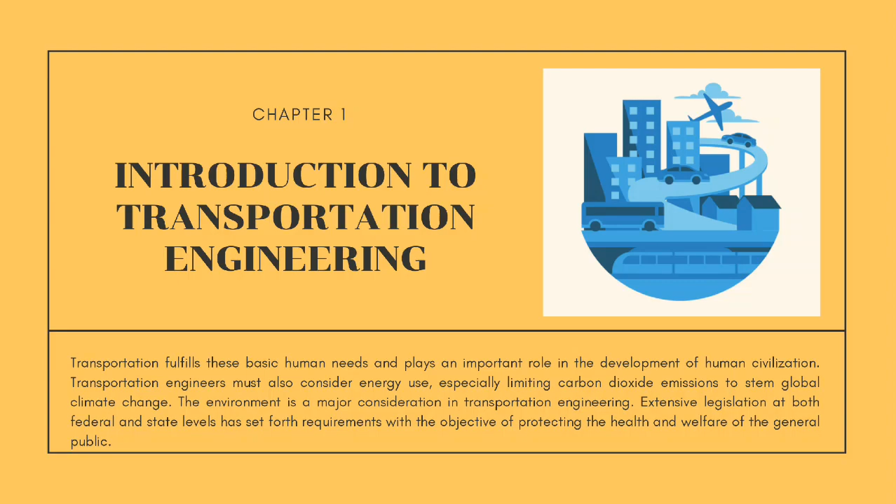So here's the table of contents of this video presentation. Chapter 1, Introduction to Transportation Engineering. For example, it is easy to observe that there is a strong correlation between human settlement development and transportation proximity. There is also a strong correlation between the quality of transportation and the standard of living, and society's expectations of transportation are high.

Under transportation engineering, we have first the transportation system. It can be defined as a combination of the elements and their interaction. This definition is general and flexible enough to be applied to different contexts. So we have here 4 terms of transportation system: the first, characteristics, study context, background, a changing world, and the role of the transportation engineer.

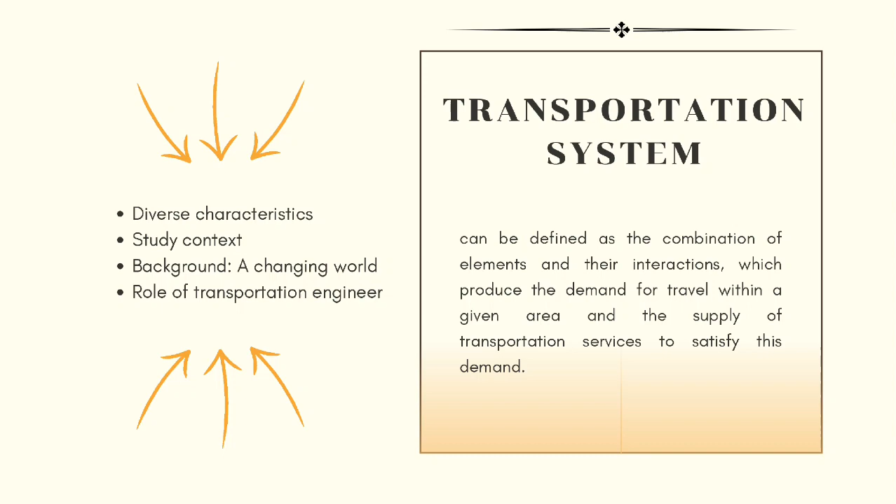We have here the characteristics of the transportation system that make it diverse and complex. First is multimodal. It covers all modes of transportation. Next is multi-sector. It covers issues and perspectives of the governments, private companies, and the general public. The third one is multi-problem. It ranges across a spectrum of issues that includes national and international policy.

Next is multi-objective. And the last one is multidisciplinary. It references the theories and methods of engineering, economics, etc. If we have the characteristics of the transportation system, of course we also have its context, and these are the following: planning range, passenger transport, freight transport, and international transport.

In particular, a strong interrelationship and interaction between transport and the rest of society is important for traffic planners in a rapidly changing world. Among them, 4 critical dimensions of change in the transportation system can be identified: changes in demand, changes in technology, changes in operational policy, and changes in the values of the public.

Finally, the last term is the role of the transportation engineer. So as I said in the definition of transportation engineering, they are responsible for planning, designing, and maintenance of civil engineering projects relating to transport networks. So transport engineering involves the analysis and evaluation of traffic signals, signs and markings, as well as the condition of the environment surrounding the infrastructure.

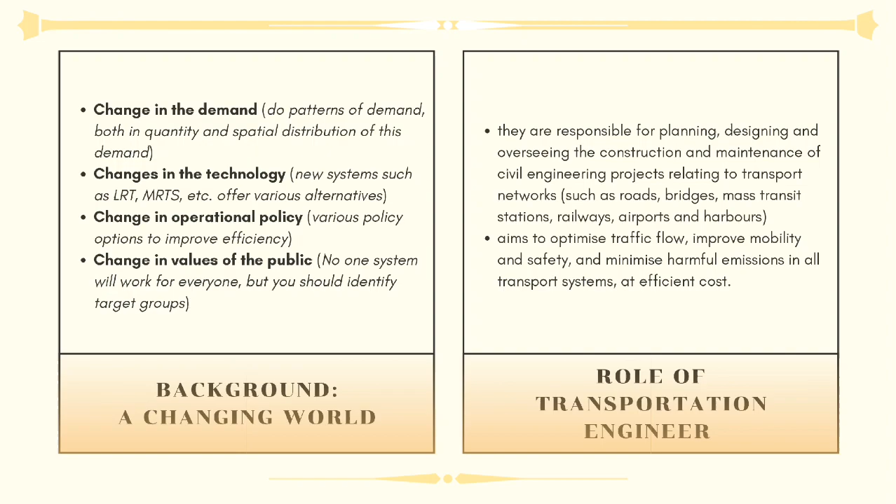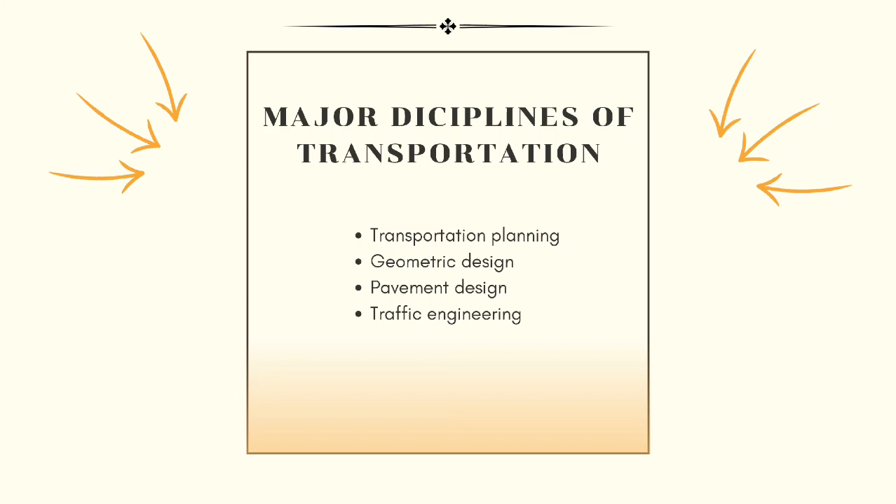Transportation engineering broadly consists of 4 major parts: transportation planning, geometric design, pavement design, and traffic engineering. Transportation planning can influence everything from business to recreation to quality of life. Geometric design includes transverse features, horizontal alignments, vertical alignments, and intersections. Pavement design mainly includes structural aspects, functional aspects, and drainage.

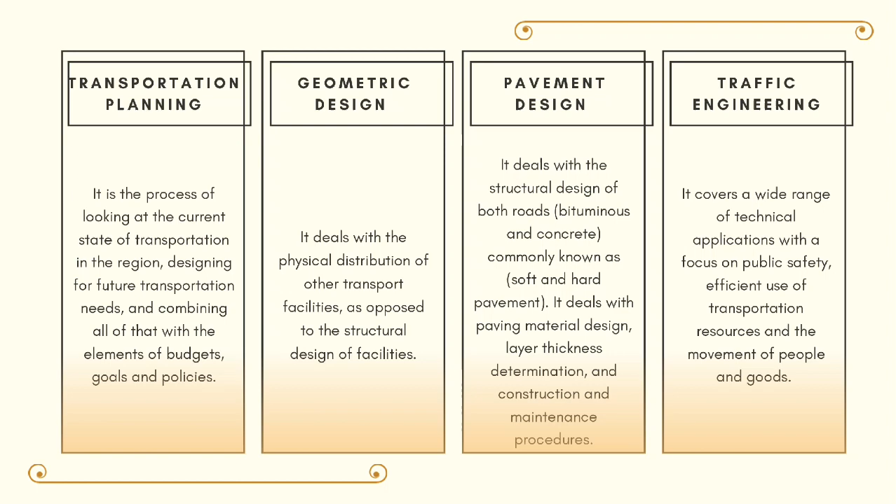The last one is traffic engineering. In short, the role of transportation engineers is to protect the environment while providing the mobility they lack, ensuring economic activity and ensuring the safety of people.

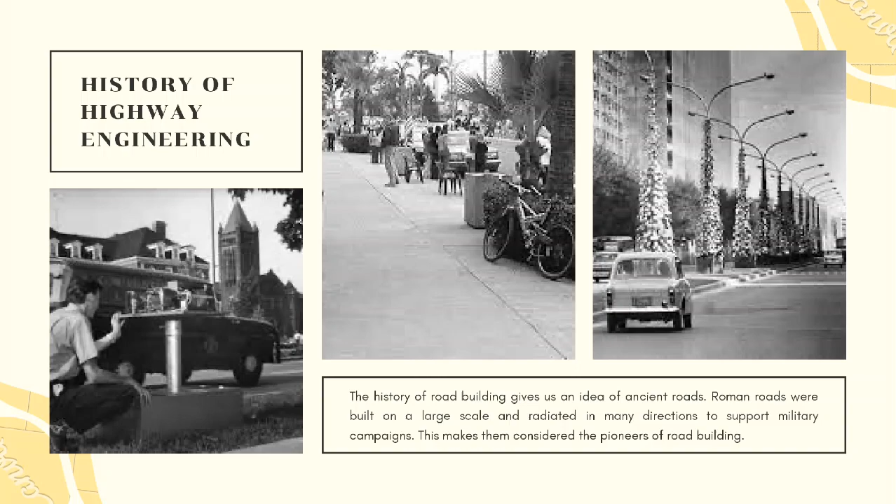Now we move to the next chapter, which is the introduction to highway engineering. So road building became known in the late 20th century after World War II, and road construction standards are constantly moving. So here I discuss the history of highway engineering. The history of road building gives an idea of ancient roads, and this section discusses the details of ancient roads, Roman roads, French roads, British roads, and more.

First is the ancient roads. We have 2 modes of transport here. The first one was by foot, and the second was the use of animals for transporting both men and materials. Under the second mode of transport, the invention of the wheel happened, and it led to the development of animal-drawn vehicles. To provide enough power to carry the wheels, newer trails tended to follow the sunnier, drier side of the trail. After the invention, the development of animal-pulled vehicles created the need for paved roads.

The next step was the construction of the Agger. It was a raised structure up to 1 meter high and 15 meters wide. The top surface of the pavement structure of the Agger was very different. Of course, it also had the main feature. Concrete was thus a major innovation in Roman road construction.

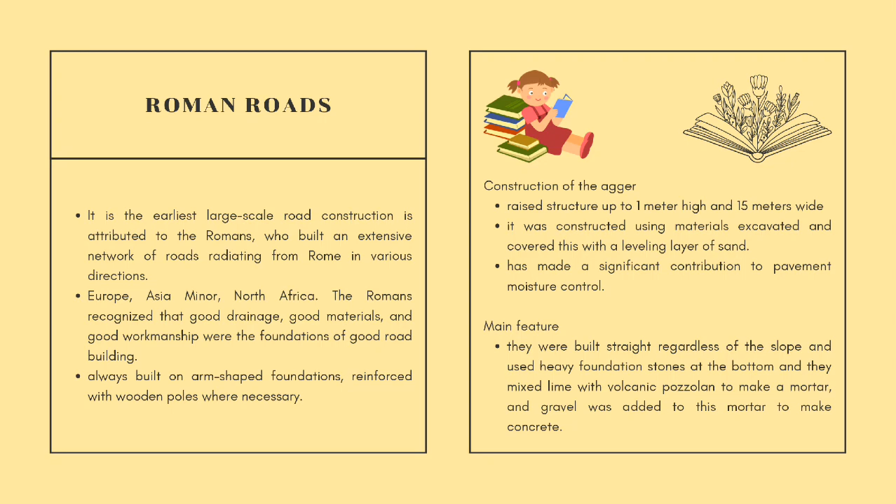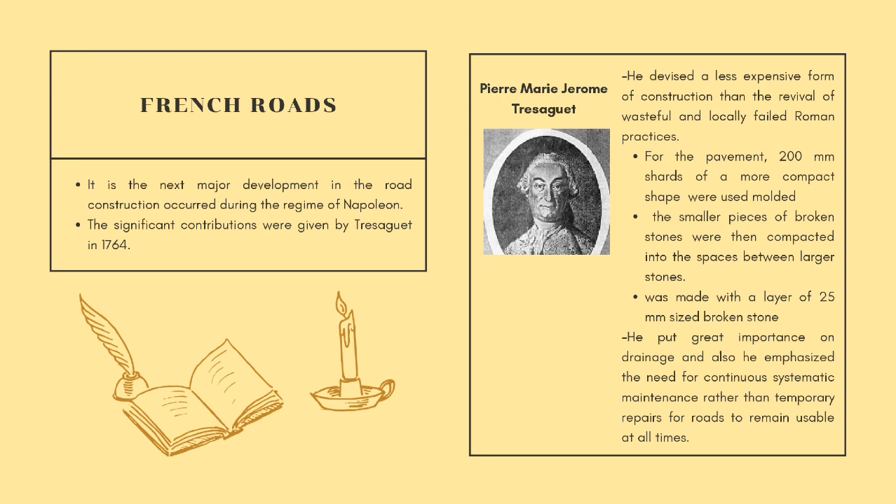The third one is the French roads. It is the next major development in road construction. In 1764, Pierre-Marie Jérôme Trésaguet gave his significant contributions, and these are the following. This created major problems with drainage, but this was counteracted by as impervious a surface as possible, arches and deep side ditches. For this, he divided the roads between villages into sections of such length that an entire road could be covered by maintenance men living nearby.

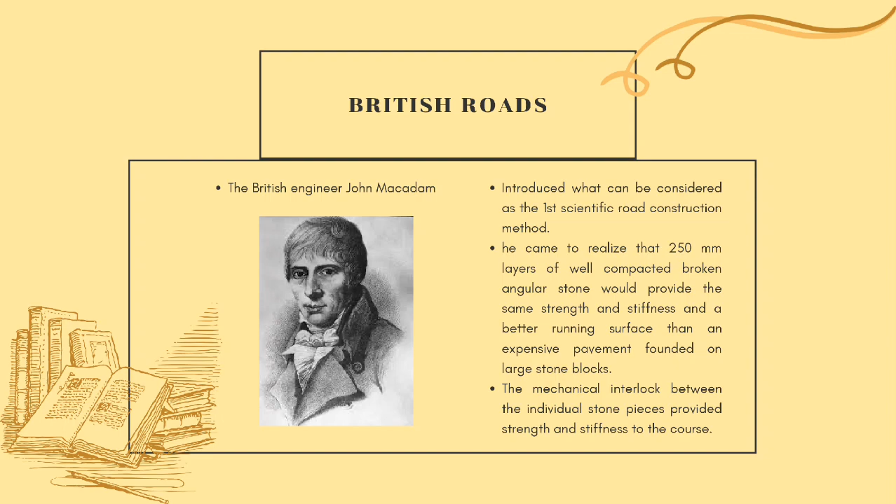The fourth one is the British roads. So here's British engineer John Macadam. He introduced what can be considered the first scientific road construction method. By empirical observation of many roads, he came to realize that 250 mm layers of well-compacted broken angular stone would provide the same strength and stiffness and a better running surface than an expensive pavement founded on large stone blocks.

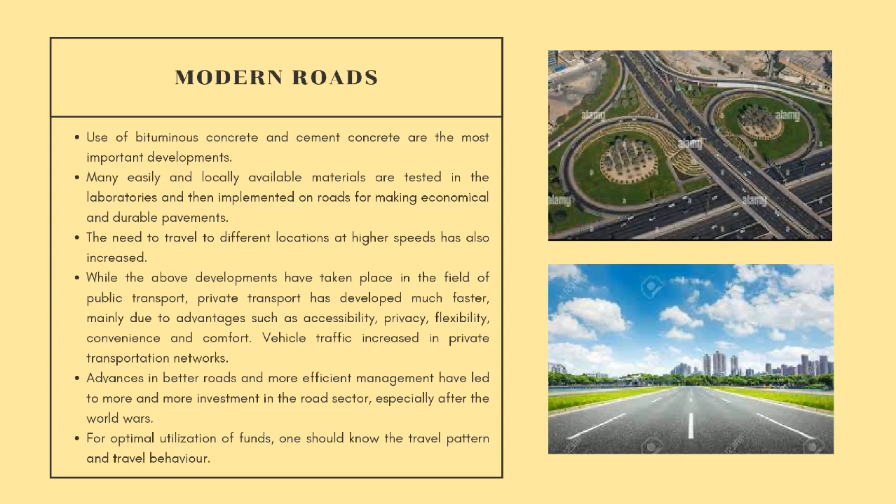The last one is the modern roads. Modern roads by and large follow Macadam's construction method. Development of new equipment helps in the faster construction of roads. This increased demand has also led to the emergence of other modes of transportation such as rail and air travel. And as a result, the available road space became insufficient to meet the increasing traffic demand, resulting in congestion.

Chapter 3. The role of transportation in society. So it is very closely related to lifestyle, the scope and location of activities, and the goods and services that can be consumed. Movements like this have changed the way people live and travel. We have 4 different roles of transportation in society, which are the economic role of transportation, the social role, the political role, and the environmental role.

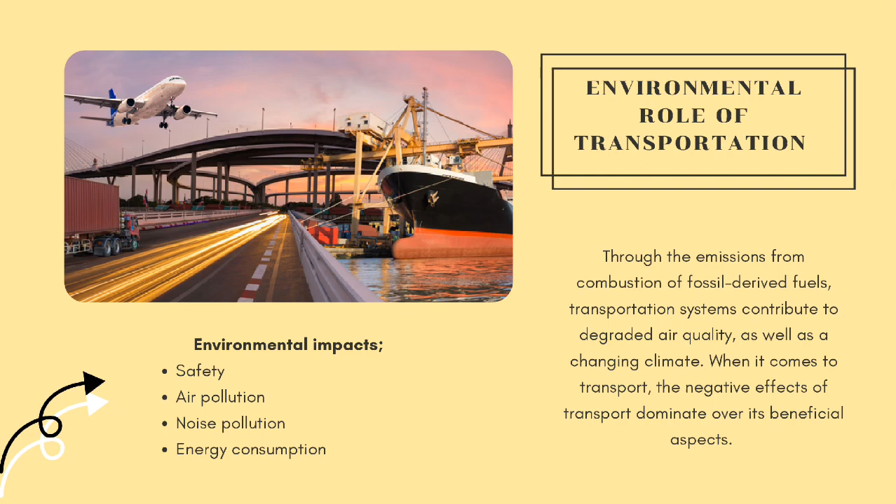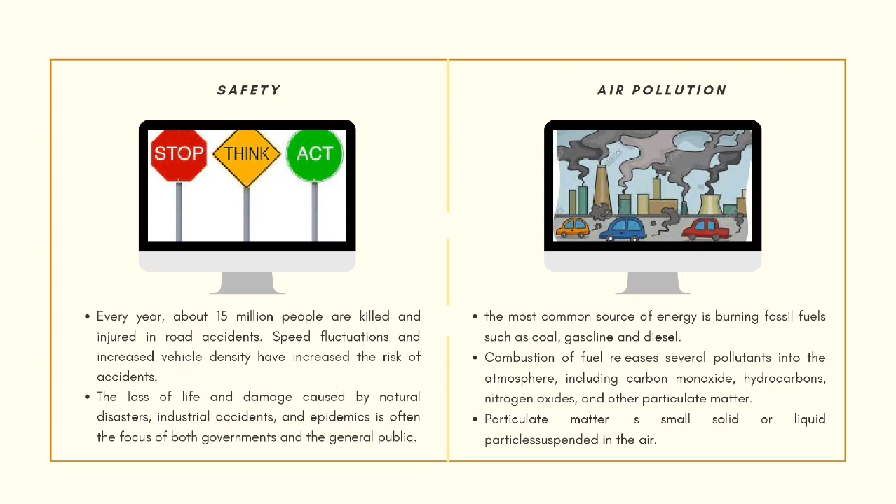Finally, the last role is the environmental role of transportation. So when it comes to transport, the negative effects of transport dominate over its beneficial aspect. So there are many categories in which environmental impacts are categorized. Here are the environmental impacts that I used to determine. We have first, of course, the safety, the air pollution, the noise pollution, and lastly the energy consumption.

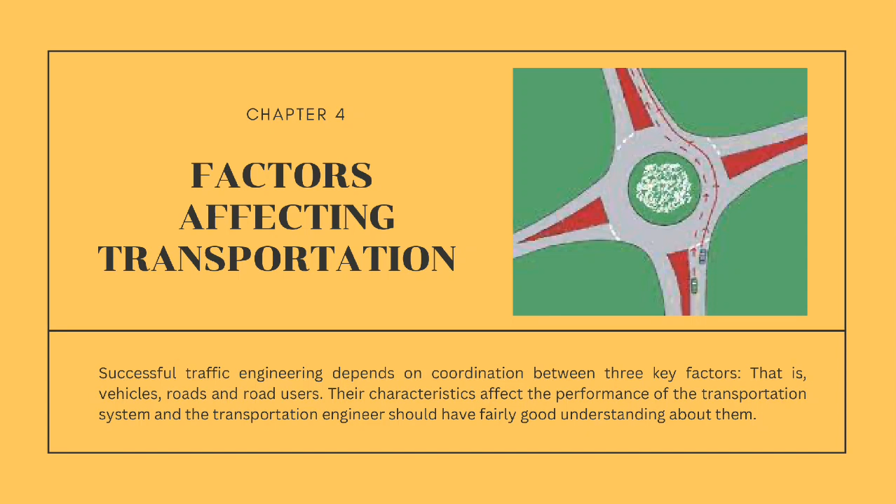As we were all waiting, finally we reach the last chapter, which is the factors affecting transportation. In this chapter, I elaborated the salient human, vehicle, and road factors affecting transportation. Human factors affecting transportation. So, for example, traffic lights adjusted to allow the average pedestrian to cross, and road safety can be a serious threat to older people. So, the design consideration should be safety. Efficiently accommodate the elderly, children, disabled, slow, fast, and good and bad drivers.

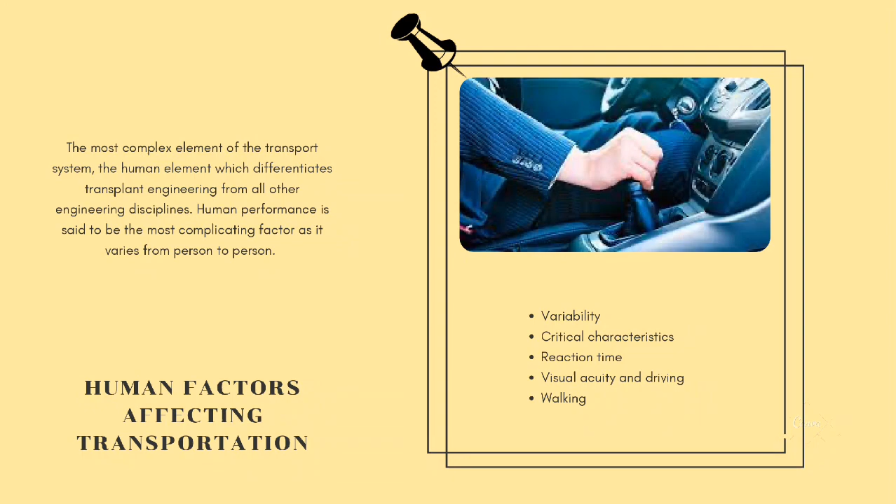So here are the human factors affecting transportation. First is variability. The human characteristics like ability to react to situations, vision, and hearing, and other physical and psychological factors vary from person to person and depend on age, fatigue, nature of stimuli, presence of drugs, alcohol, etc. Second is the critical characteristic. Third is the reaction time.

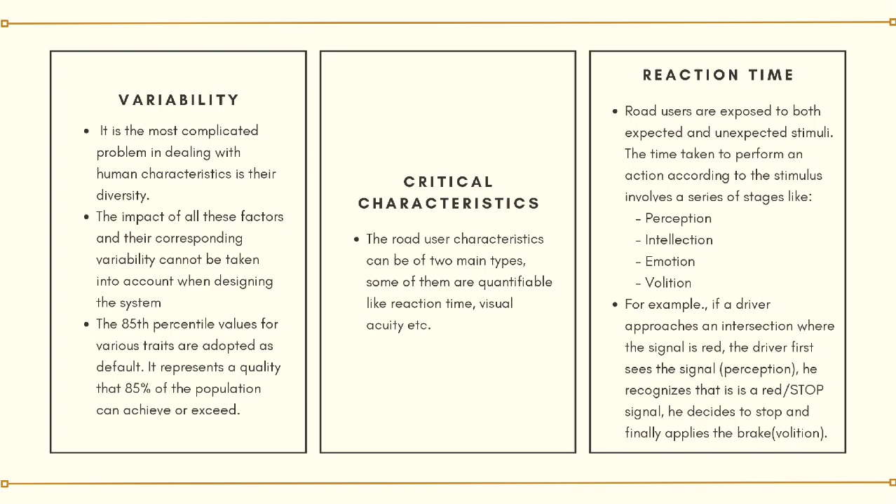The time taken to perform an action according to the stimuli involves a series of stages like perception, intellection, emotion, and volition. So, an example of this is that. Fourth is the visual acuity in driving. So, traffic control measures. PIEV time is reduced when visibility is clear and accurate. This is important when placing traffic signs and signals, but other factors such as dynamic vision, depth perception, etc. must also be considered for an accurate design.

Last is walking. The most common road users are pedestrians. However, the influence of physical, mental, and emotional factors should be considered. Facilities such as parking lots, traffic lights, bus stops, overpasses, and underpasses shall be laid out and designed according to the maximum distance that users can walk.

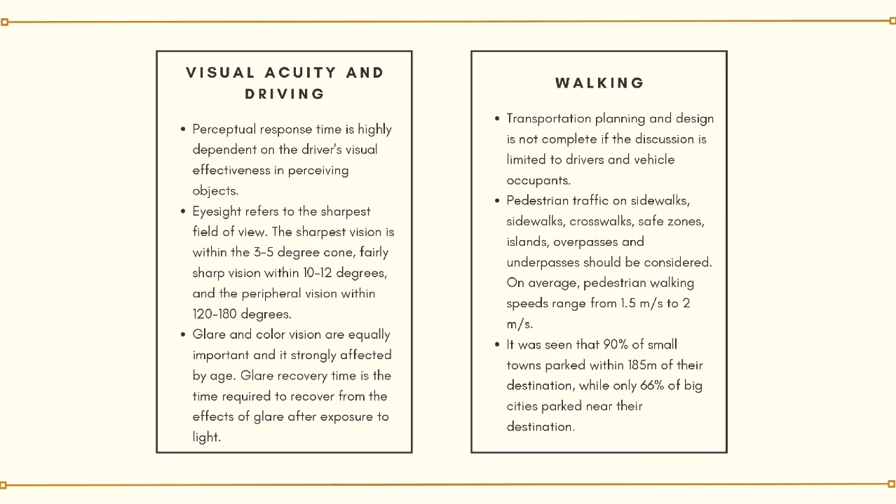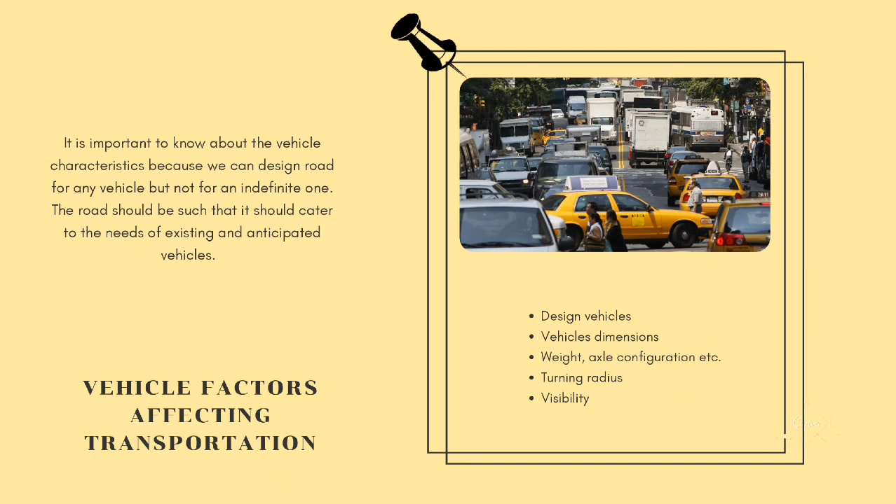The next factor is the vehicle factors. It is important to know about the vehicle characteristics because we can design a road for any vehicle but not for an indefinite one. The road should be such that it caters to the needs of existing and anticipated vehicles. Some of the vehicle factors that affect transportation are discussed in this slide. The first one is the design vehicle's dimension, weight, axle configuration, etc. The turning radius and the visibility.

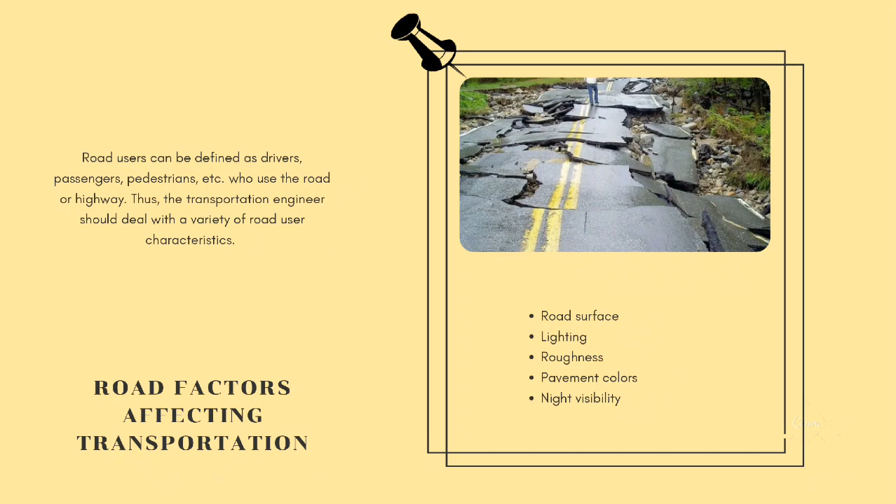Finally, the last factor is the road factors. So, road users can be defined as drivers, passengers, pedestrians, etc. who use the road or highway. Some of the road factors that can affect transportation are discussed in this slide. First is the road surface. For heavy traffic volumes, a smooth riding surface with good all-weather anti-skid properties is desirable.

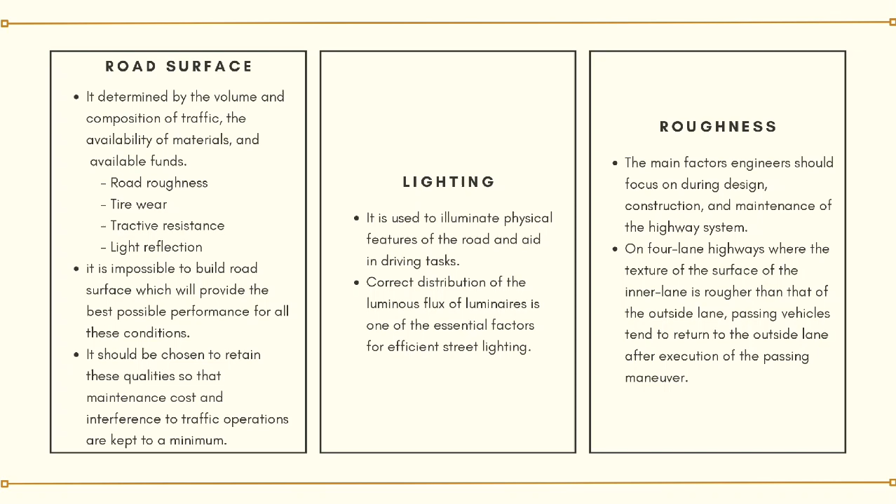Second is the lighting. It is important to plan road lighting based on the wide range of traffic information such as nighttime, vehicular, and pedestrian traffic and experience with accidents. Third is roughness. Drivers tend to want a smoother surface when given a choice. Fourth is the pavement colors. Contrasting pavements may be used to indicate preferential use of traffic lanes.

A driver tends to follow the same pavement color, having driven some distance on a light or dark surface. He expects to remain on a surface of that same color until he arrives at the major junction point. Last is the night visibility. Since most accidents occur at night because of the reduced visibility, the traffic designer must strive to improve nighttime visibility in every way he can. An important factor is the amount of light which is reflected by the road surface to the driver's eye.